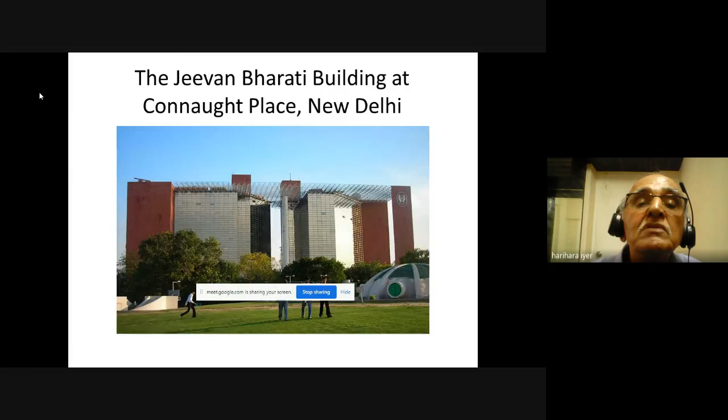See, this is Charles Correa. How many participants know about him? Okay, I will come to that. This is some of the Gandhi Smarak Sangrahalaya Ahmedabad. This is Jeevan Bharati building, Connaught Place, New Delhi. This is British Council.

Laurie Baker, we already discussed. Nobel laureates. Now, John Goodenough, 97 years. He has invented the lithium ion rechargeable battery, which is of relevance now today when we talk about green buildings, because that is the essence for solar rooftop, which can store energy for your building consumption, green building consumption. Then look at his age, 97 years.

That means you have got enough time. We have got enough time. We senior citizens also have got enough time. We have seen our earlier speaker, Professor Ramana, has got his doctorate after his 65th year from a foreign university. So age is just a number.

So lithium rechargeable battery is of importance in the present day green revolution, because that can be applicable not only for storage of solar energy, but also for the storage of energy for running your future vehicle, e-mobility.

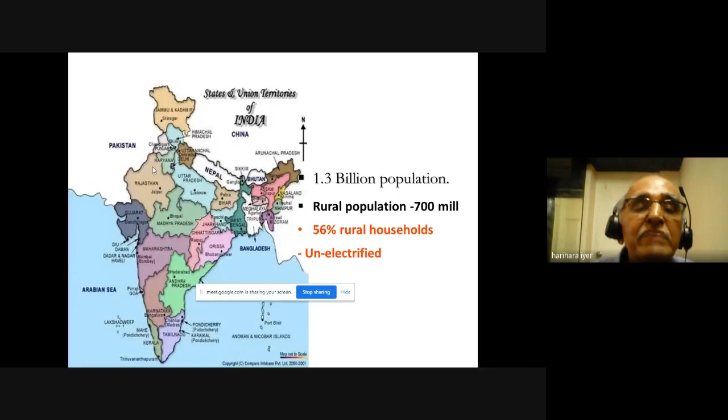But then, unfortunately, what is happening is there are structures, buildings throughout, whether it is Hyderabad or any city, all concrete structures, all steel constructions, that are mostly inefficient, that is energy inefficient. So all increasing the global warming.

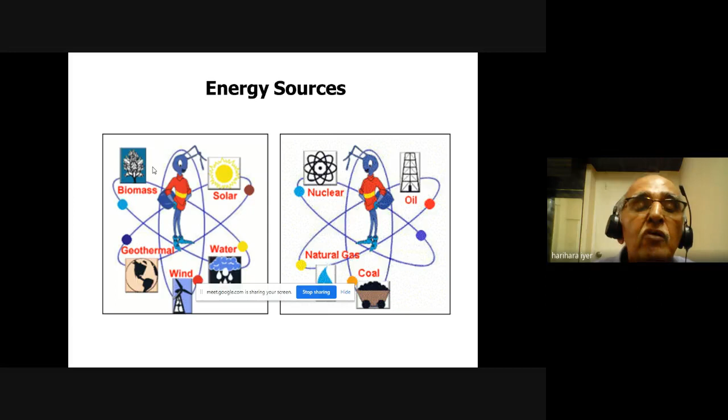Now, energy resources, Professor Ramana has well eloquently expressed, I don't want to go into the details. And solar energy is going to be the next tested energy source.

Hyderabad, where from we are speaking, was a very salubrious climate 10 to 20 years back. Now it is all plus 45 degrees, and there is unnecessary damage of forests, whether it is needed or not. So this is the situation, global warming facts.

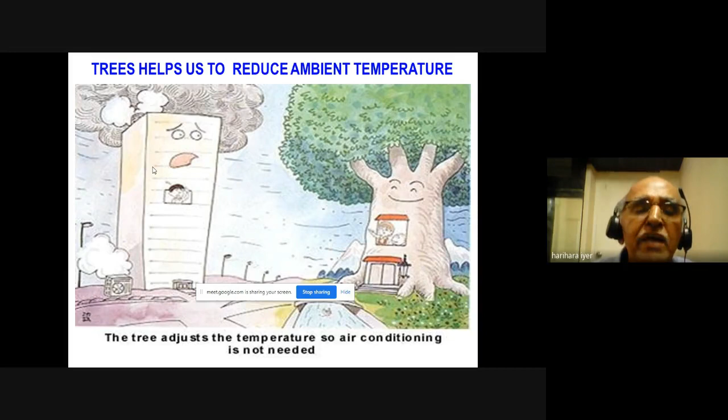Now, we also see the addition of carbon footprints by using our electronic and electric gadgets. So these are the carbon footprints. So the solution is again green building.

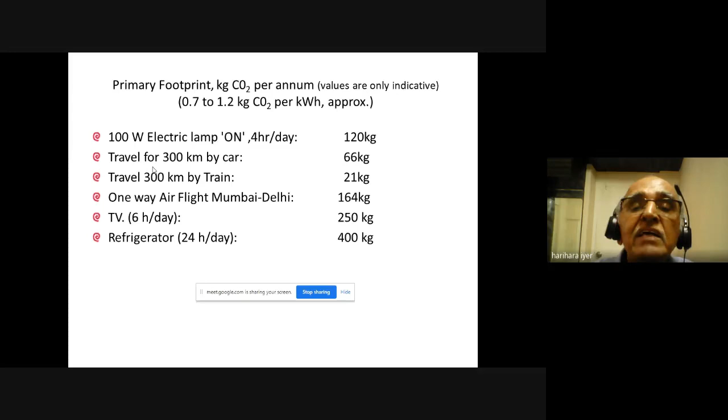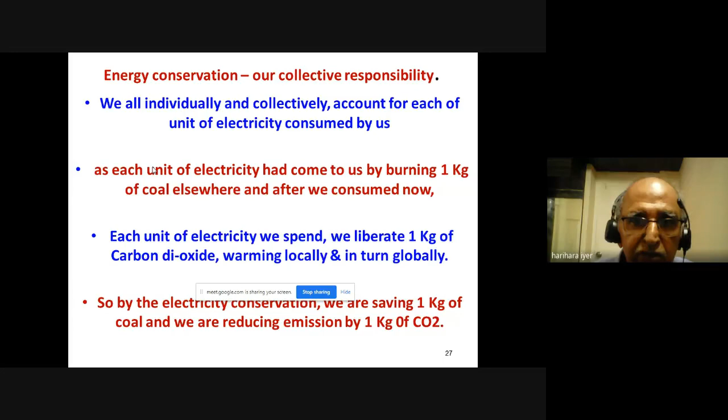So it is due to human cause, but these are man-made disasters, anthropogenic disasters. So we have to solve it collectively.

Energy efficiency benefits everybody, individually and collectively. Individually means we will be bringing down our electric billings. Collectively, the company in which you are working will be getting benefited out of energy efficiency measures, conducting energy audits.

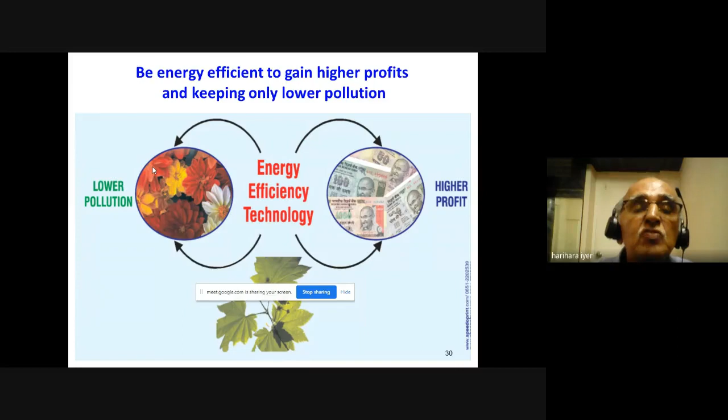Efficiency is related with profits, so the company can gain more, and economic prosperity will be generated. Renewable energy is last. First is energy conservation, then energy efficiency, then finally renewable energy.

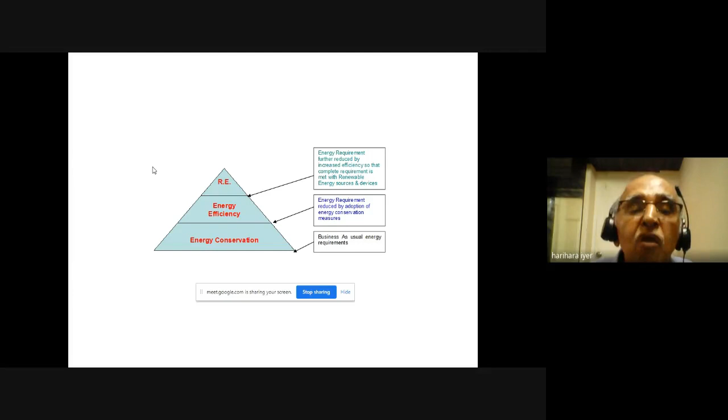This is an organization, or rather a pyramid of energy conservation and solutions. So energy consumption by sector - now you see domestic sector is 20%, that is in India.

What about in United States? United States is 72%. That means they consume the maximum energy, and their carbon footprint is much more than that. When there is 72%, a general arithmetic calculation, 72 divided by 20, is nearly four times more than us. Because they are developed, their consumption is more. Their per capita commercial consumption is far 4 to 5 times more than us.

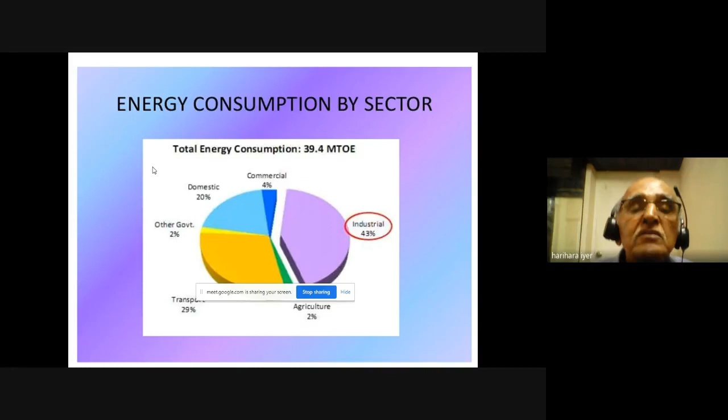Now, economy as a whole - agricultural, industrial, transport, domestic and commercial. Transport is up to 29%. Most of these are coming from petroleum, diesel, lubricants and fossil fuels. And our total electrical consumption is also because of fossil fuels.

Now, this Energy Conservation Act has already been discussed, so I'm skipping through them.

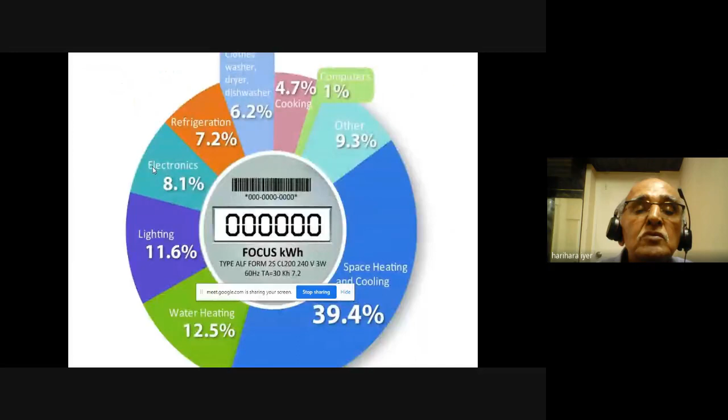So, power consumption by coolers and fans, fridge, TV - you see, these are our domestic consumption. Those who are interested, coolers and fans - what are the coolers? AC, air conditioners, and fridge. These are the cooling and heating systems, the main principal culprits.

So we should know how to tackle them, how to adjust our temperatures, fan speeds, depending upon our requirement. We have to see to it that without investing anything, we should be able to bring down our consumption.

How is it done? Switch off the lights whenever not necessary - these are simple things which you can do. In your home also, you can do a home energy audit to find out how much energy consumption reduction can be achieved.

First thing is to go through your power bills. From the power bills, you can understand how much is the total power consumption, and from there it can be brought down by adjusting the air conditioners. See, nowadays everybody has got an air conditioner.

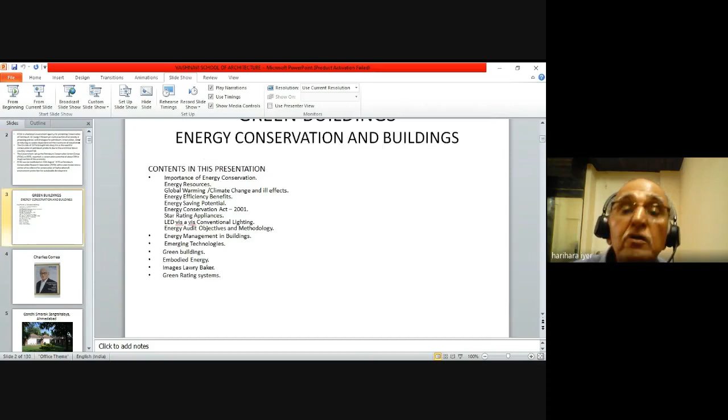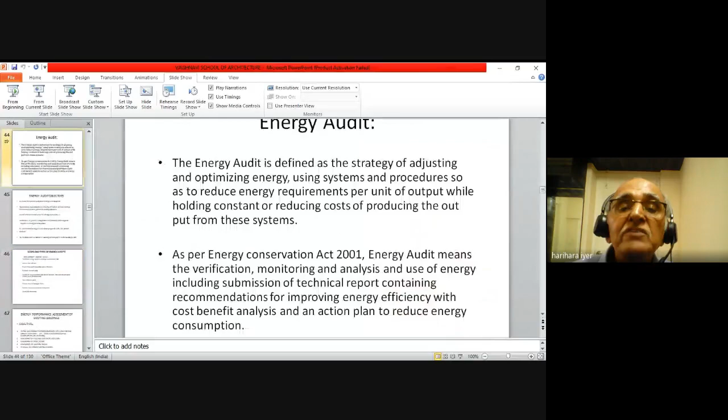So room air conditioners, refrigerator, comparative label, everything has been discussed. Lighting and fans, energy audit - these are the points already covered by Professor Dr. Ramana, including building energy efficiency.

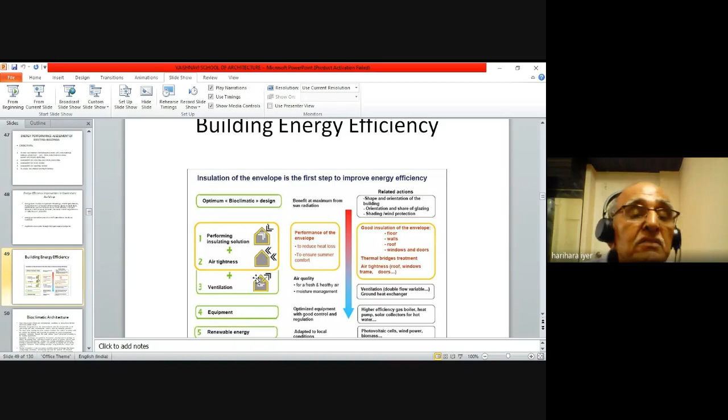So that is a subject to be discussed when we are talking about HVAC - heating, ventilation, and air conditioning. It's a very specialized subject. The organizations called ASHRAE and ISHRAE are on the job because it is a global environmental problem. So ASHRAE members will be getting all the details.

Now, bioclimatic architecture - the climate and environmental conditions are also taken into consideration, and thermal visual comfort inside, because comfort is more important. So when you consider the design aspects, that is based on local climate to make the best possible use of

Now, the shape of the buildings, surfaces - most of these points have been discussed by Professor Ramana. Then techniques to be applied by the external envelope, openings, and he has also requested acoustic aspects, very important. Acoustic aspects, in what way it is important. Lighting intensity is important.

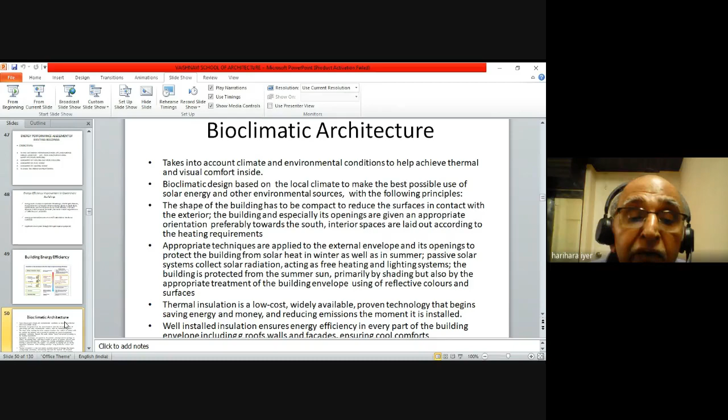Then thermal insulation at low cost, and we will be discussing in detail some of these aspects in future slides. Thermal insulation, R value - it has got its R value and U value, which are mostly discussed in the energy conservation building codes. So thermal transmittance, that is the U value, that is thermal resistance R value, and heat losses through the U value. These are things which have to go in depth.

AC needs airproof - all AC requires this because it is working in a closed environment. So we have to ensure that no leakage takes place. That's applicable to the refrigerator also - there should not be any leakage. Leakage happens means there is inefficiency, loss - there is a heat loss taking place. That loss has to be added on by more energy consumption. So the simplest way is to arrest leakages and have an environment where it is airproof, heat proof, for specific energy uses.

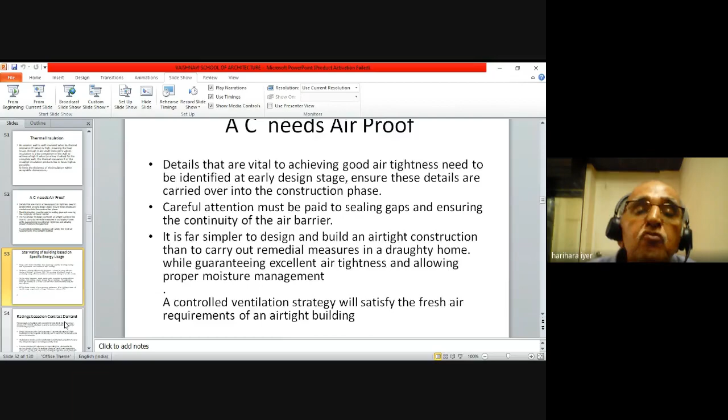Energy audit studies involve something called specific energy efficiency, specific fuel efficiency. The Bureau of Energy Efficiency has a scheme of energy efficiency labeling of buildings called the star rating. We will discuss in detail what the star rating program is, which provides public recognition of energy efficient buildings, thus creating market demand for such buildings.

BEE star rating system is also one of the rating systems. We will be discussing in course of our presentation very many rating systems. The first rating system is Energy Star labeled, based on the Energy Conservation Act. That is the first thing we have to understand. Second thing which BEE has introduced along with the star rating is the Energy Conservation Building Code. We will have a discussion about it.

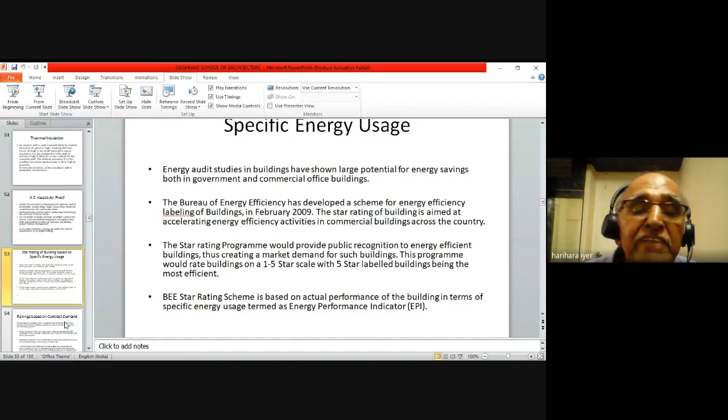Professor Ramana has highlighted some points, and we cannot go into the details. Energy Conservation Building Code requires explanation, requires 5 or 6 days of full session. Ratings are based on contract demand. 120 kVA buildings have already been discussed. So beyond that, you need an energy audit to be done.

So that is for commercial purposes. What is used in commercial purposes? This law is already there, but it's yet to be implemented. But it will be coming soon, sooner or later.

So, climatic zones - warm. We have got 5 different zones in India. These are climatic zones based on warm and humid climate, composite climate, hot and dry climate, and temperate regions. These are the basic regions generally used for rating purposes.

Can anybody say which type of climate Hyderabad comes under, and which cities fall under warm and humid, hot and dry, or temperate regions? This is hot and dry climate, this is cold climate - so you can keep these in mind. You can give the answer in the chat box.

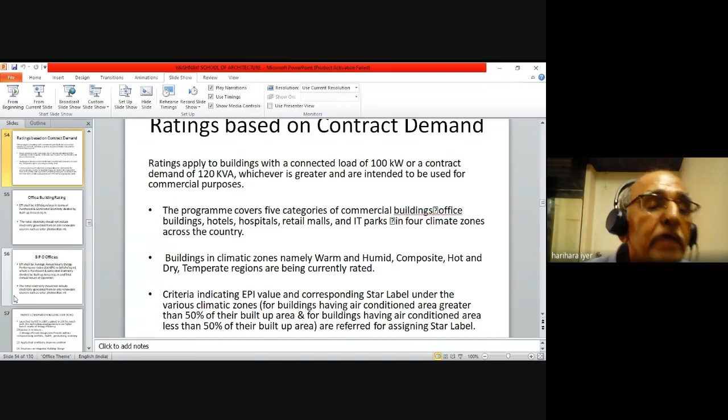Now for office buildings, EPI, Energy Performance Index, shall be the kilowatt hours per square meter per year in terms of purchased and generated electricity divided by built-up area in square meters. The star rating is based on this. There are standards given based on this particular kilowatt hour value - 1 unit per square meter per year has been prescribed.

So a total table has been taken, and based on that, you can apply for star rating. The total electricity shall not include electricity generated from on-site renewable sources such as solar. So it is devoid of that - you cannot consider that for the rating system.

For BPO offices, again, the average annual hourly energy performance index is in watt-hour per hour per square meter. We are going into further detail for BPO offices, because BPO offices consume much more electricity power than ordinary buildings. The total electricity shall not include electricity generated from on-site renewable resources - same conditions.

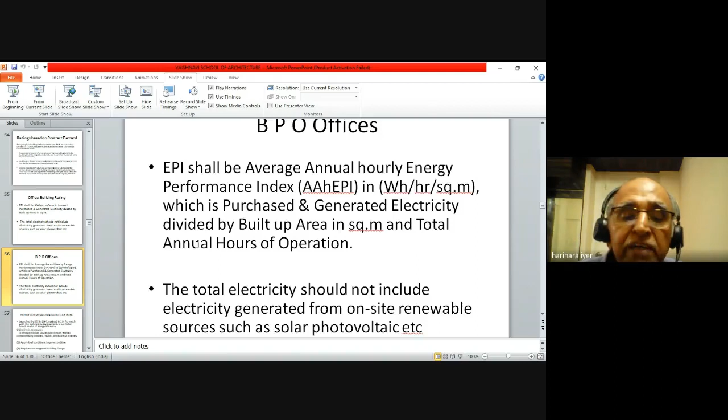Energy audit design for BPO offices, energy audit launched by BEE. This is the Energy Conservation Building Codes. These codes were launched by BEE in 2007, and updated in 2017, 3 years back, with technology development setting higher benchmarks for energy efficiency.

The objective is to ensure energy efficient design and retrofitment without compromising comfort. That's very important - you should be as comfortable as possible, considering health, productivity, and economy. Apply local conditions to improve - that's what local condition was about.

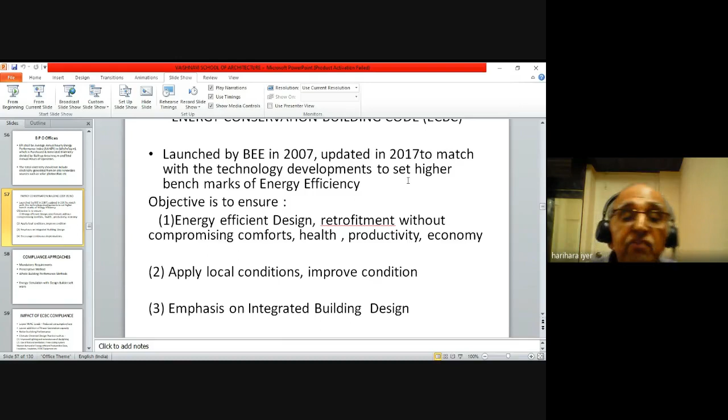So we have given five climatic conditions. Depending upon that, conditions in Hyderabad may not be the same as in Vijayawada. It may not be the same condition in Bangalore or in Jaipur, Rajasthan. The conditions are different - the emphasis is on integrated building design.

So in compliance approach for energy conservation, there is mandatory requirement - certain requirements are mandatory, no compromise. Then a prescriptive method based on climatic conditions, everything based on that. And a whole building performance method. These are the two main requirements - prescriptive method and whole building performance method.

Details are there in the Energy Conservation Building Code 2017. The simulation can be carried out by software. There are several softwares, some payable and some free, out of which Design Builder software is one of the software used for building simulation.

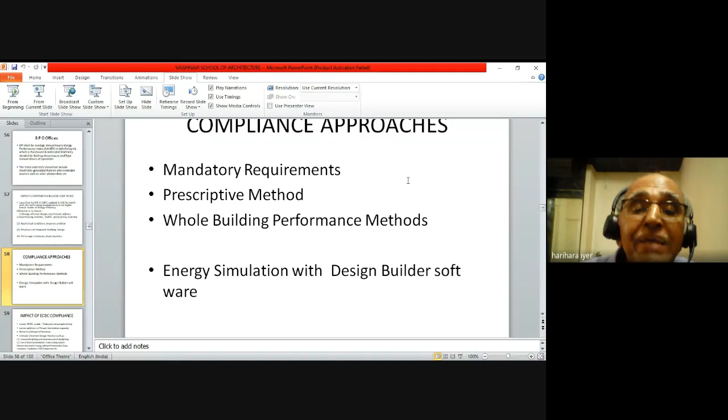So the impact of ECBC compliance includes, lower HVAC load, reduced consumption cost, lesser addition of power generation capacity, better building performance, climate-oriented design practice such as improved lighting and extensive use of daylighting, use of natural ventilation and free cooling systems, and market demand for energy efficient products such as glass, insulation, and HVAC equipment etc.

Now, Energy Conservation Building Code compliance is very much required for new buildings. It is made compulsory, and it has been implemented also. Accredited architects are necessary to go through the building design and give certification. Only then, in Telangana, is it possible to proceed further with the building construction. This is applicable to the commercial buildings which have already been discussed.

Now, green buildings. What are green buildings?

Green buildings involve daylight simulation, shading analysis, lighting simulation, energy simulation, and climatic analysis. All these are put together to make a building green.

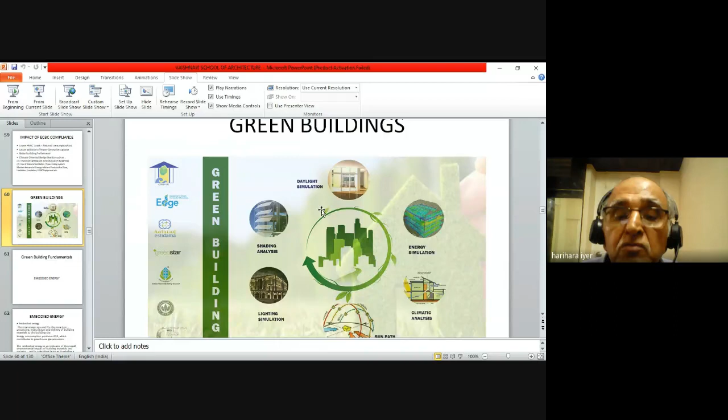This will go into the details of green building fundamentals. What are all the green building fundamentals? Materials of construction - the total energy consumed by a building includes the embodied energy.

What is embodied energy? It is the total energy requirement for the extraction, processing, manufacture, and delivery of the building materials to the building site, as Professor Ramana has very aptly described.

What about cement manufacture? 180 kilowatt hours per ton of cement manufacture, which has been brought down to 80. So there is embodied energy in the cement we use for building construction, which is absolutely necessary. Nowadays we are only constructing buildings with cement - there's no alternative to cement till now.

So the cement has to be manufactured, then brought to your site, and there is transport involved - fuel consumption is involved. If you bring it by trucks, or if it comes by railroad, there is electrical consumption involved too. So this is also added to the embodied energy.

Energy consumption produces CO2, which contributes to greenhouse gas emissions that we have discussed earlier. So embodied energy is an indicator of the overall energy impact of building materials, contributing to global warming, and is a deciding factor in whether you are selecting the proper materials.

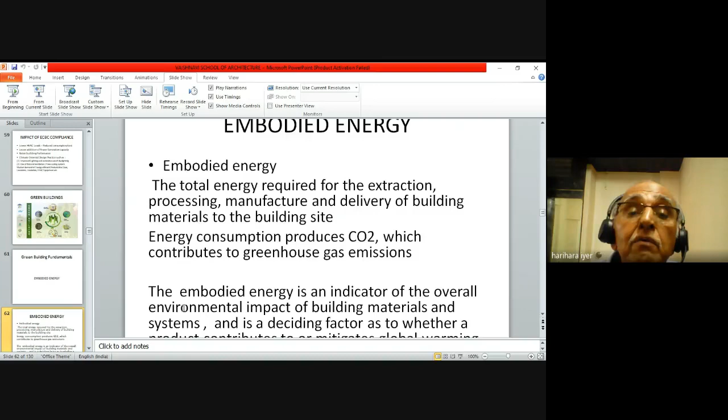We will go into the details of what are the proper required materials to make a green building. The total amount of embodied energy may account for 20% of the building energy use.

Reducing embodied energy significantly reduces the overall environmental impact of the building. So embodied energy must be considered - it's one of the most important criteria for the lifespan of a building also. We have discussed life cycle cost, so this is another factor which has to be taken into consideration.

Now, after demolition of a building, what do we do with the demolished material? This is another thing - it goes to the land, to the dump. That's what we are generally doing. Once demolished, you throw away the material somewhere, adding to the land mass as unnecessary load.

As the energy efficiency of the building increases and energy consumption reduces, the embodied energy of the building material will also become increasingly important.

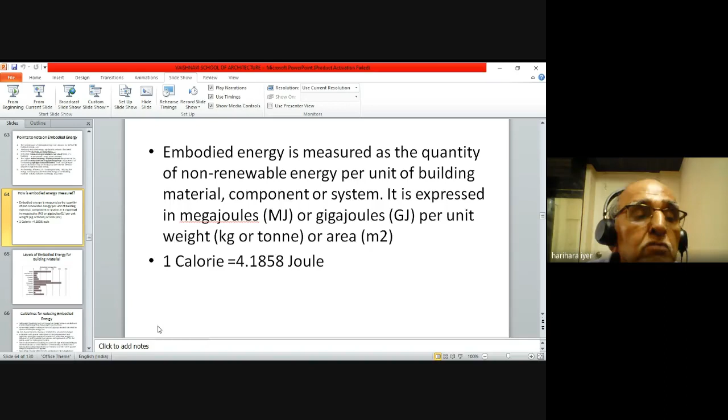Now, out of the materials, we will discuss embodied energy - we can measure embodied energy in quantitative terms in megajoules or gigajoules per unit weight. One calorie is considered as 4.1858 joules. Now these are the embodied energy values of building materials.

So the material to be selected for a green building is stone, then stone masonry. These are simple ideal materials to pick up for green building construction. But what is the next alternative?

Stainless steel, no - aluminum is preferred because you can reuse aluminum. Timber also you can reuse, so timber is the next alternative.

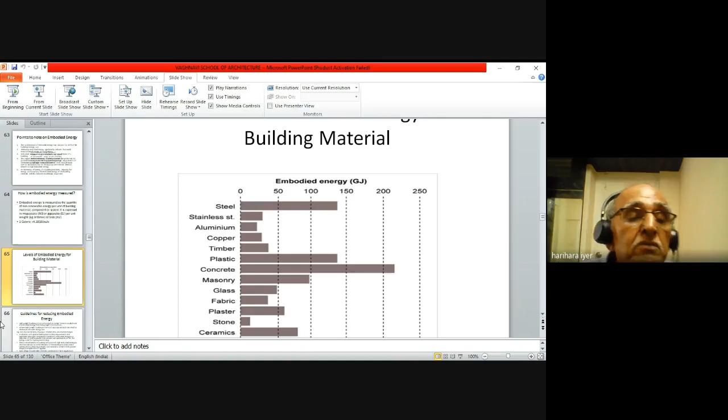For an aspiring green building enthusiast, these points are very, very important. Please note it down. In climates with greater heating and cooling requirements and night temperature variation, a high level of well-insulated thermal mass can significantly offset the energy used for heating and cooling.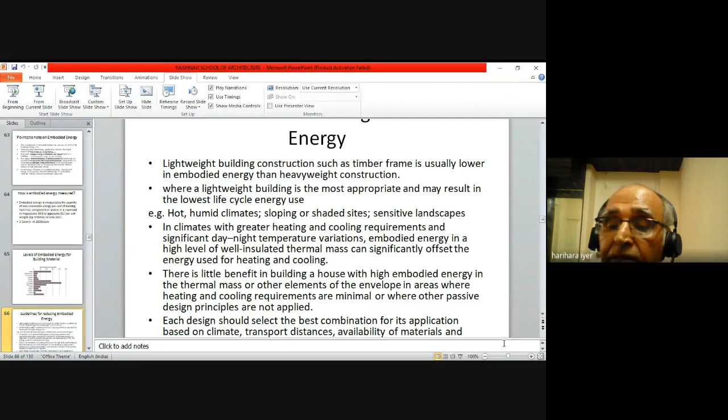There is little benefit of building a house with high embodied energy in the thermal mass or other elements of the envelope in areas where heating and cooling requirements are minimal. So we have to pick and choose the right material to suit the environmental conditions. Each design should select the best combination of application based on climate, transport distances, and availability of materials. Here, the architecture has got a big role to play in understanding and choosing the right material.

Now, management steps in green building: design for long life and adaptability, using durable, low maintenance materials. All these points given here below are important. You have to take all these points into consideration. There is a lot of scope here for research work. If you want to carry out research in architecture, we have to go into the scientific details so that we can work on future designs.

Recycled items are given a lot of importance. Why recycled items? The embodied energy is already taken away from the recycled material, so in a hypothetical situation, you can say it has zero embodied energy. Recycled materials, whether wood, masonry, or even cement, can be reused, and everybody knows it can be reused. But then some work is required to reuse them, and masonry can definitely be used back. So these are the points, I don't want to go into all of that.

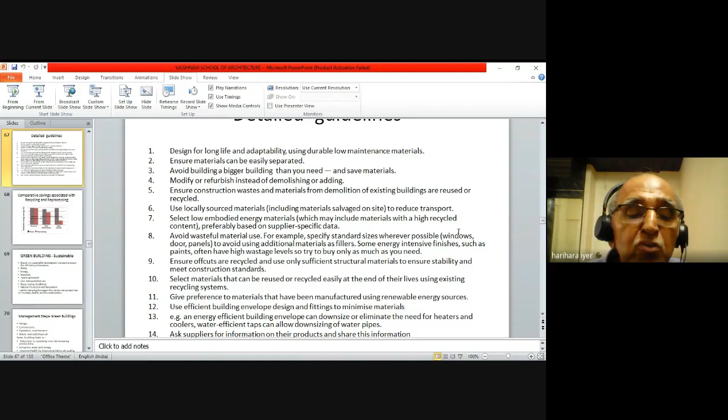If you want to go into the details we can go back to the slides, but the steps are all very important, each and every step. Recycling and reprocessing of aluminum, steel reinforcement, and glass products - we recycle, what are the advantages? Reuse and reprocessing. The embodied energy saving percentage has been shown. You can see that the percentage of saving in aluminum is much more than glass, glass and aluminum are almost the same, and reinforced steel is less.

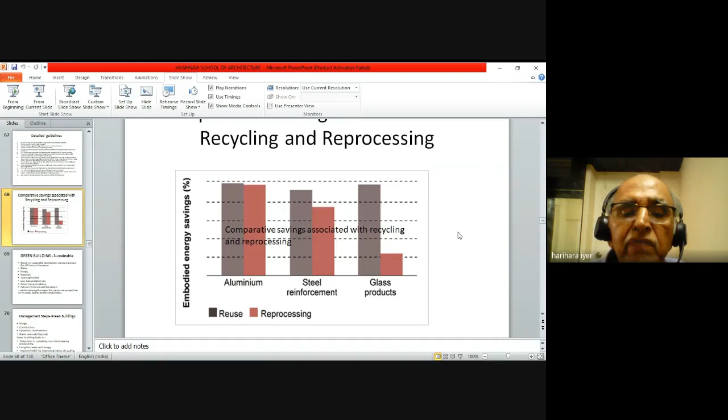Now, green buildings, sustainable green buildings - so we are discussing sustainable architecture, based on sustainable development concepts: water, energy, materials, waste generated, less transport and use, better living conditions, habitat protection and restoration. These are the important points for a green building.

So you can also make existing buildings green by increasing water efficiency, reducing water and energy consumption, and managing materials. Again, waste generation - what do you do with the waste you generate? Everything we throw out, the municipality ends up dumping our waste materials, including what we generate as domestic waste. Domestic waste is the maximum.

Hyderabad is totally filled up, they don't know where to dump it. There's no dumping space. And what about the transportation cost? What about the stink generated out of waste? Domestic waste has organic and inorganic components. The organic waste can be recycled - we can make compost out of it, and so many other things. We can even make combustible gas which can be reused for our kitchen, that can also be done.

The easiest thing we can do is composting. That composting can be used to manufacture organic fertilizers, which are very much required for our agricultural use, to grow organic vegetables.

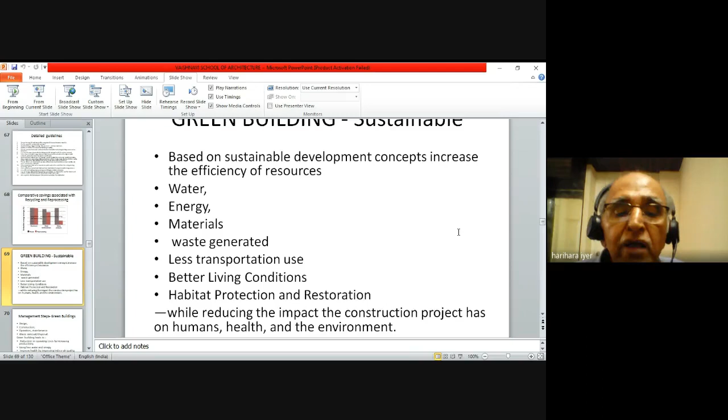Then habitat protection and restoration - we are more interested in habitat because individual protection, once you protect it in your own house, can be extrapolated to habitat protection wherever the society you are living in is. So it will have an all-pervading effect, a very, very good ripple effect, while reducing the impact of construction projects on humans, health, and environment.

Now green buildings again, management steps: how to manage green building design, construction, operation, maintenance, waste removal, disposal. We have already discussed materials, envelopes, orientation, construction materials, operation and maintenance. Green building leads to reduction in operation costs by increasing productivity, using less water. It's a repetition of points discussed earlier.

Now building design aspects, going into the nitty-gritty. High performance wall, fly ash bricks. Why fly ash bricks for walls? Because fly ash bricks have the lowest embodied energy and are very cheap available, provided local conditions are favorable and it's not coming from a far off distance. Fly ash bricks is a good option.

Insulation, then glass, appliances, BEE star rated, already discussed. Lighting system, energy efficient lamps, already discussed. Renewable energy sources: solar, photovoltaic cells, water heaters, biomass - these are the primary energy sources. Energy monitoring, energy meters, sub meters, water meters.

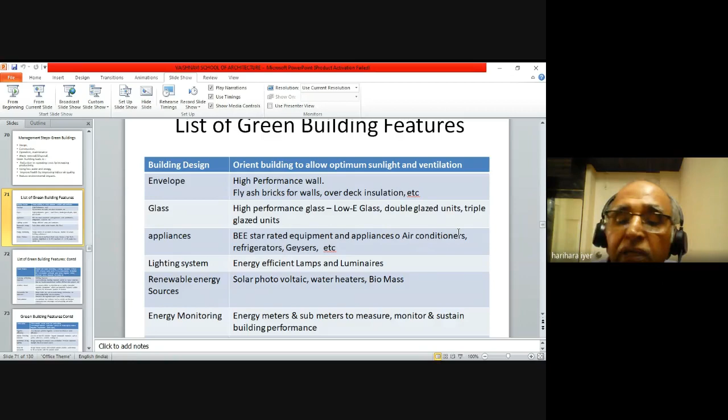Water meters are another area which is very, very important. Once you introduce water meters, we will know the consumption. When you know the consumption, we can introduce effective measures, because once you get charged for it, you will try to understand what it is. What you can measure, only you can control. If you cannot measure, you cannot control.

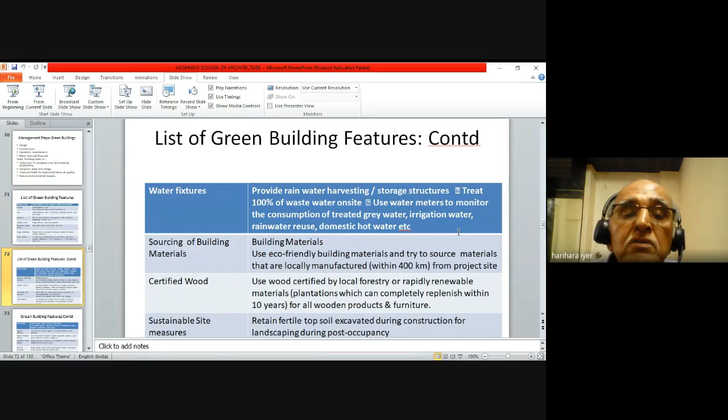List of green building features: source of building materials, certified wood - again going back to the basics, it's repetition. Irrigation efficiency, landscaping - green building features continued. Interior finishing materials already discussed. Ventilation and daylighting already discussed. Views for occupants again. Sustainable building materials were discussed. Construction,

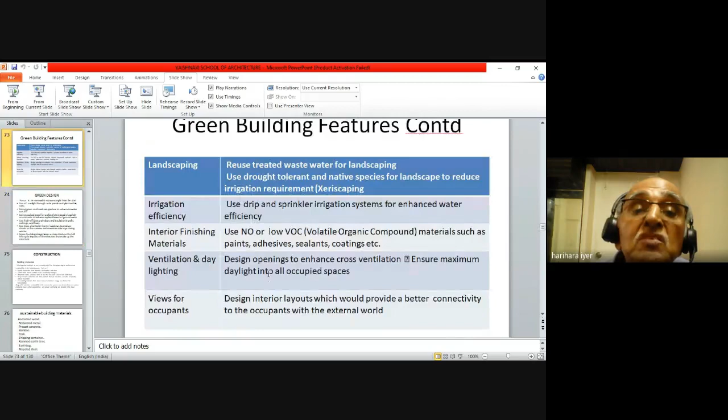focus on renewable energy, sunlight through solar panels using photovoltaic cells, using green roofs, rain gardens to reduce rainwater runoff. Nowadays rainwater harvesting is picking up fast. Each building can be provided with rainwater harvesting so water can be reused, and that will take care of water needs. We will discuss this when we discuss net zero energy building, net energy consumption.

But coming to green roofs, it is gaining prominence - what roof material do you choose? Underneath the roof you have extreme heat. At least 10-degree difference in heat can be taken care of with the proper roof material, so you can bring down your air conditioning load. Using packed gravel and packed parking lots instead of asphalt or concrete - these are materials which can be chosen. High efficiency windows and insulation in walls, ceilings and floors. Use trees planted in front of windows to produce shade.

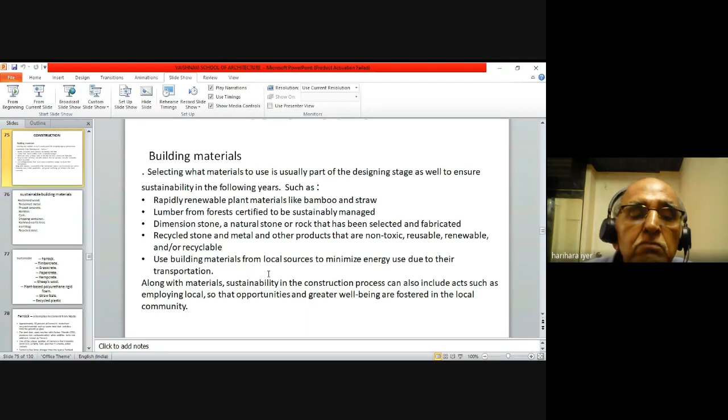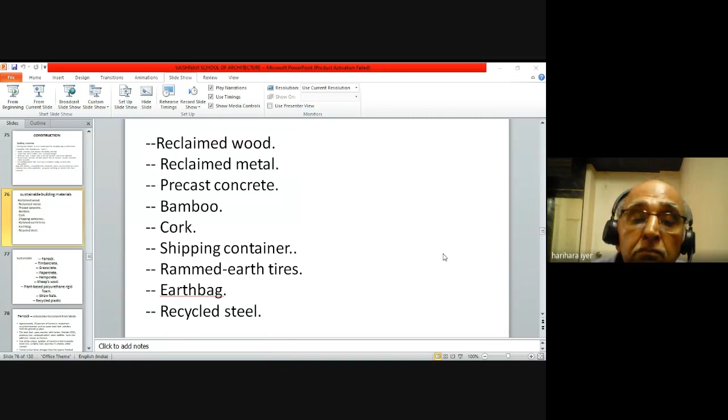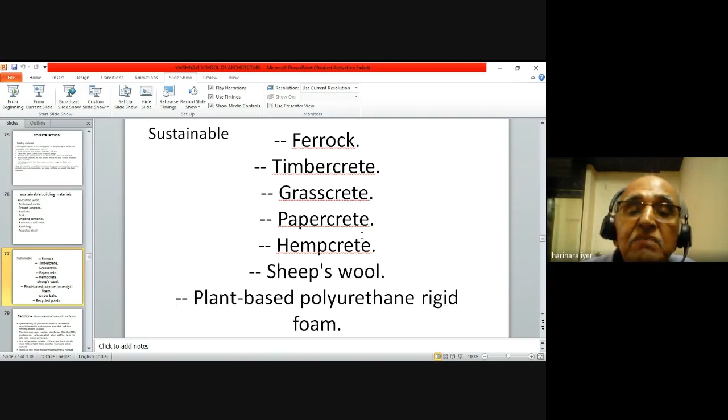These are the basic inputs I've given. So Ferrock is a material on which we can carry out more research to find out the suitability of this one in future green building construction material.

One of the unique qualities of Ferrock is that it absorbs more highly toxic gas than it creates, unlike cement, so CO2 emission will also reduce. It's 5 times stronger than typical Portland cement, so it is a big substitute for Portland cement - it is all very environmental friendly. All Ferrock is made from recycled materials. This is an area for research for future aspirants - the timbercrete, a blend of sawmill waste, cement, sand, binders, and non-toxic deflocculating additive.

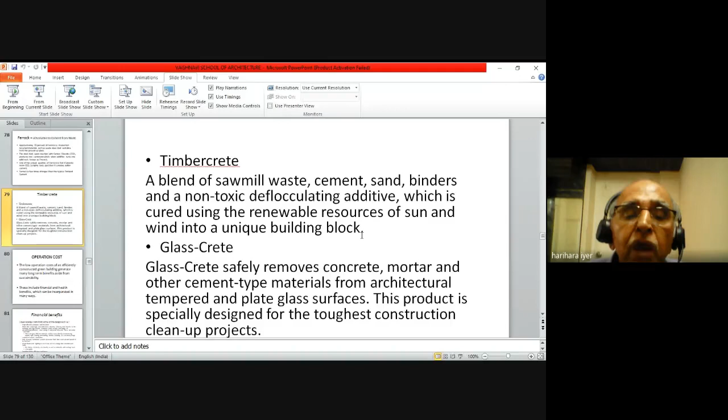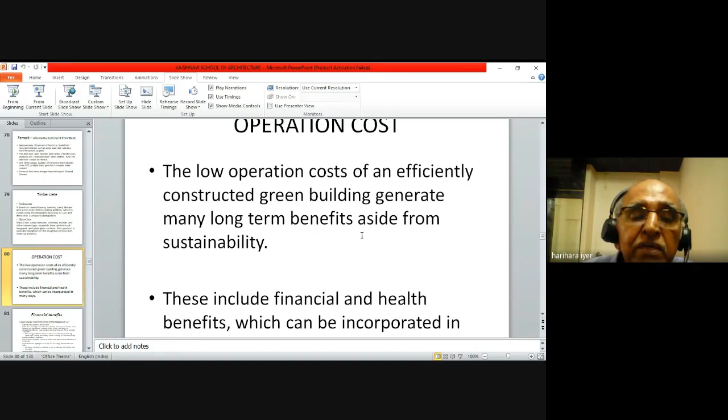Health benefits we have discussed: financial benefits, maintenance benefits, lower energy costs, designs such as high efficiency windows and insulation, roofs that create high solar reflectance. So many aspects are discussed, including capitalized natural ventilation.

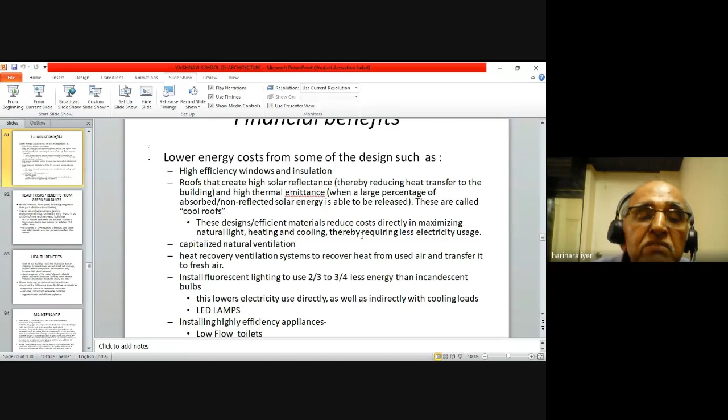Green buildings also provide health benefits. Indoor air pollution is among the top 5 environmental risks; unhealthy air accounts for about 30%. WHO reports that indoor air pollution causes 14 times more deaths than outdoor air pollution. So the more you stay in your house during lockdown, there are 14 times more deaths possible than COVID deaths.

There are hundreds of EPA regulated chemicals, including ozone and sulfur dioxide. Because we use a lot of chemicals in our cleaning, all these are embedded within the four walls of our house. These relate to health benefits.

Most of our dwellings have too much lead dust or chippings, which causes kidney and red blood cell damage, impairs mental and physical development, and may increase blood pressure. These are all scary facts, and honestly, putting together these slides is getting scary even for me.

About a quarter of our nation's industrial plants and water treatment facilities are in serious violation. This risk can be reduced and conditions improved through green building.

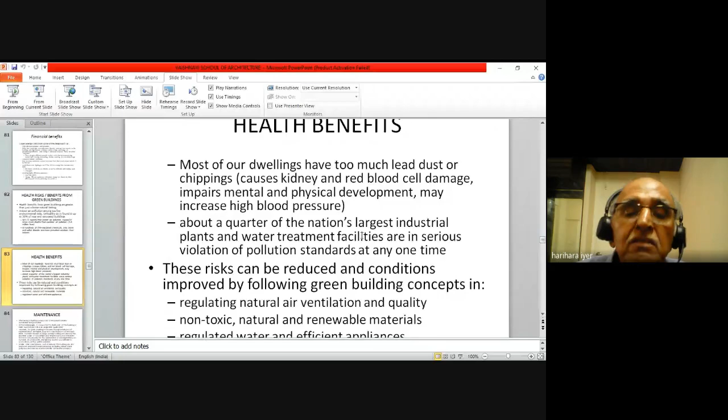Waste reduction. Maintaining a building is important as it ages. For green buildings, considering initial costs and everything, the long-term maintenance is often much lesser.

The advantage of green building is that maintenance cost is brought down — that's one of the key advantages highlighted. Smaller scale maintenance, such as cleaning the building, can also be chosen to improve indoor air quality, reduce water pollution, and maintain environmentally sustainable concepts.

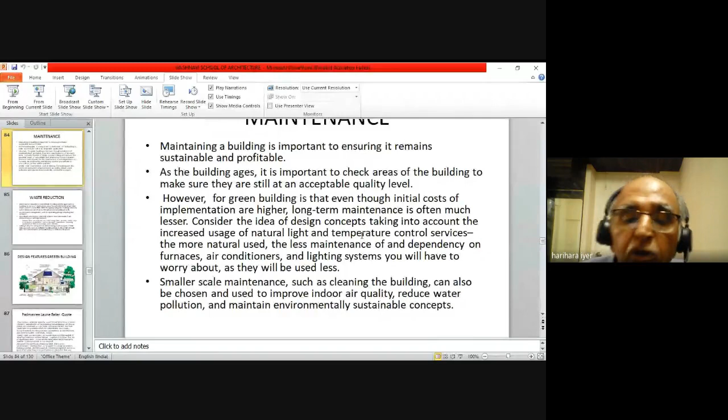Waste reduction can be achieved at several levels by taking a green approach to buildings, in terms of construction and materials used, which helps divert waste from landfills with appropriate green building measures. These points have already been discussed earlier, and we're highlighting them again.

On-site waste management, centralized wastewater treatment systems, and reuse of water — whatever water we use can be reused again and again. In fact, 90% of the water we use in our house can be recycled back into the system. Even drinking water can be derived from the water we create in our house, and toilet water can be recycled.

You can create manure out of that by composting it — organic manure can be created. And water purification plants are there; RO systems are already in place to make recycled water drinkable.

There are a lot of prospects for using water effectively and avoiding waste, because water is going to be a major component — water shortage is going to be a global issue. Here in our colony, we can't sustain without water tankers, and we don't want to bring down our water consumption, which wastes 60%; only 40% of what we get is actually needed.

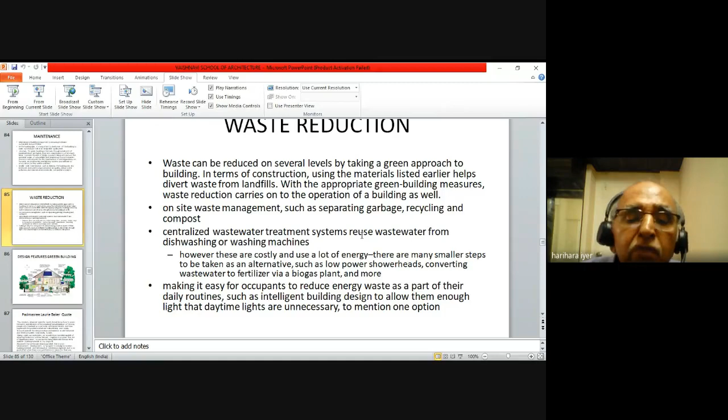Maybe 150 liters per person is sufficient for human consumption per day, making it easy, but we are spending more than 500 to 600 liters. Making it easy for occupants to reduce energy waste as part of their daily routines.

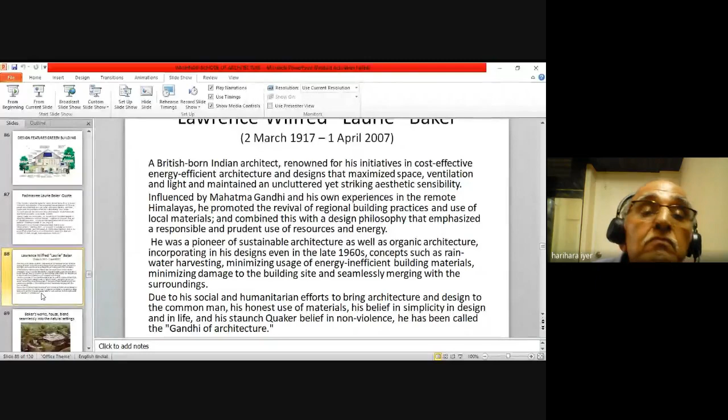Now these are some examples, seamlessly merging into natural settings. This is his house, which he made in Thiruvananthapuram, showing his work amid natural surroundings. Look around - anybody would like to live in such a place instead of staying in a concrete jungle.

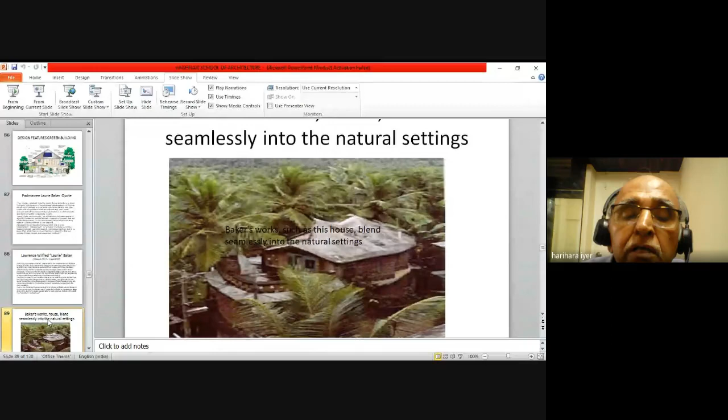Now green certification is based on a different scale - recycled and reused materials, waste reduction, reduced office waste, purchase and use of recycled content, energy savings, water conservation, pollution prevention, chemical reduction, reduced vehicle emissions, and environmental purchasing. All these aspects are taken into consideration while granting certification.

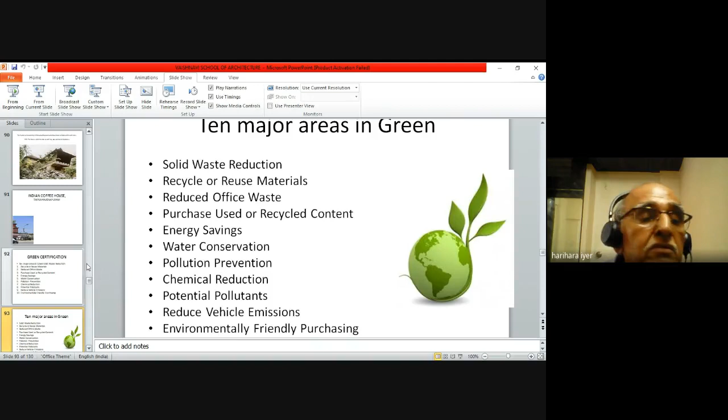So there are 10 major areas in the green building rating system. We already discussed the BEE star rating for buildings. Now GRIHA, another rating system, is pioneered by TERI, and TERI as well as MNRE use the GRIHA standards, taking the total habitat into consideration.

Next is IGBC, which is also an Indian rating system.

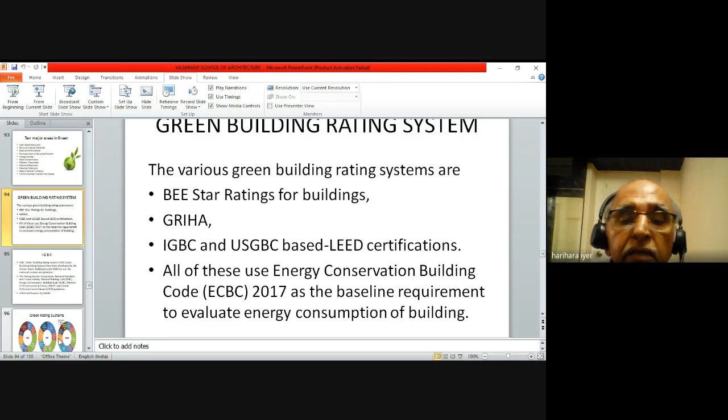IGBC is based on LEED certifications. That is USGBC, US Green Building Council. They are using LEED certification. Then ECBC, again we have discussed.

The Indian Green Building Council rating system, IGBC, has been developed by the Indian Green Building Council to suit the national context and priorities. The rating system incorporates national standards and codes: national building codes, energy conservation building code, Ministry of Environment and Forest, and Central Pollution Control Board. These guidelines are taken by them.

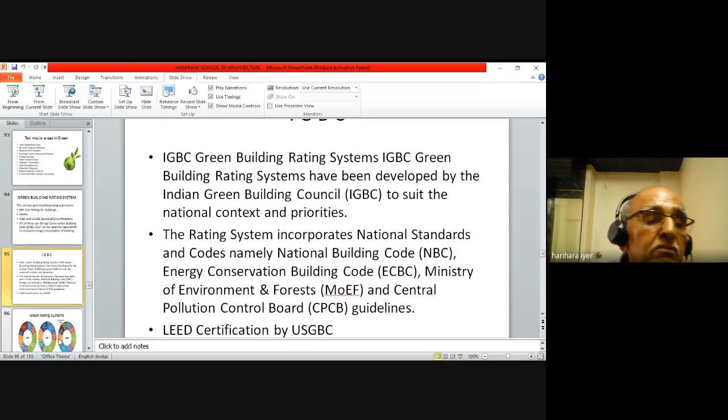LEED certification by US Green Building Council, LEED, for energy and environmental design of buildings. So these are the rating systems we already discussed: LEED, IGBC, and Griha.

Griha has detailed slides. Griha is an Indian system, so it is Green Rating for Integrated Habitat Assessment. The total habitat is taken into consideration from 2000 onwards. It has undergone a lot of changes from 2000 to now, the latest being 2014. Many changes have been made depending upon the time and environment. These are the areas where there are so many rating systems, around 25 or 26 of them.

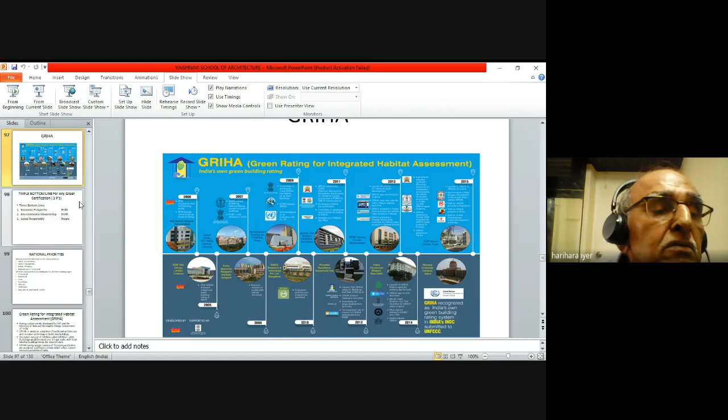Now each certification has got 3 bottom lines: economic prosperity, environmental stewardship, and social responsibility. This one is addressed to profit, this one to planet, and this one to people. These are considered to be the 3 vital P's.

This comes under the UN Development Goals, UNDG, so development goals are part of it. What are the national priorities? Water conservation, waste management, energy efficiency, and reducing use of fossil fuels.

Different rating systems are based on different building types: commercial, residential, cities, townships, schools, healthcare, data centers, and several others. Data centers are maximum energy consuming, so these also come under the rating system. Then commercial, residential, everything - cities and townships are also coming under that.

Now Green Co, that is CII, is also coming in - they have got a rating system which is not shown here.

Now the rating system developed by TERI, Griha - that is Green Rating for Integrated Habitat Assessment. We already discussed this point, so I don't want to go into it. It uses the best traditional architecture and modern technology to build new buildings. The latest version of Griha is called Griha 2015. This is the latest; it would be rated on a 1 to 5 star scale, with a 5-star labeled building being the most efficient.

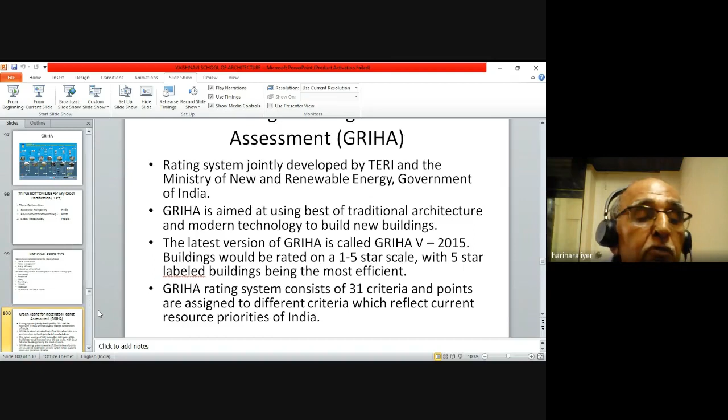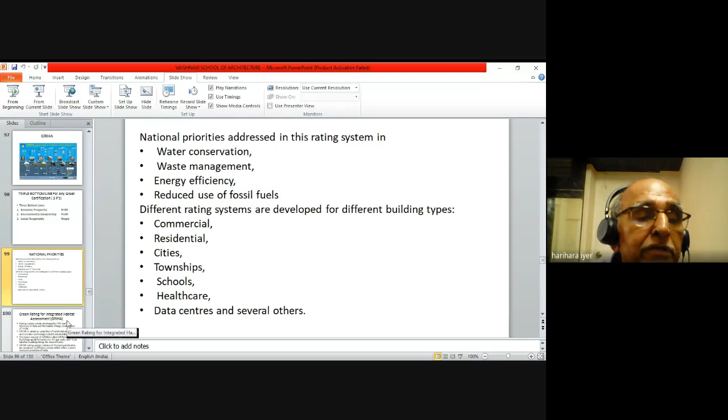I don't know what is your syllabus in the architectural examination. We don't know how far it is going to help you in the examination. I am not sure, but perhaps you can give feedback in the chat box on whether this is useful for your examination purpose. I will be very happy if it helps from your examination point of view.

That is very important. So the LEED system - which is Leadership in Energy and Environmental Design - it's a third-party certification for design, construction, and operation of a given building. This is actually contributing globally. LEED certification is global, no doubt it's global.

But to get this certification, you have to go through several stages, 2-3 different stages. Only then will you get the LEED certification, which is not as complicated as our IGBC system. LEED certification all over the globe is very high, but in India it is very less. So there may be an opportunity for your LEED certification, to be sure.

But then you have to undergo a lot of hassles, because you have got a preliminary associate level which you cannot use for your certification - it can only be a stepping stone. So you will be spending some time. Anyway, I don't want to discourage it, but this is one of the negative things which I observed.

Then LEED certificate in USA is a premium certificate, very global. These are all global. Australia has got a different green certificate, and Sri Lanka also has got it.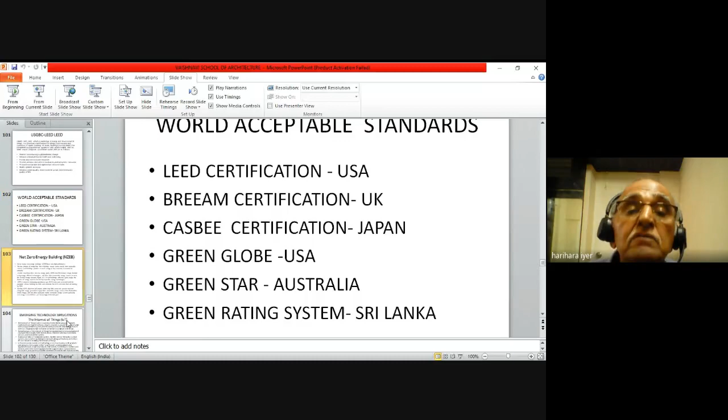Now we're coming to net zero energy buildings, which we discussed earlier. In net zero energy efficiency, you need not look for energy from anywhere outside. This energy can be created with your renewable energy sources.

It can be stored with your battery, and water can be consumed with rainwater harvesting. That can be stored throughout the year, which is sufficient, and you can recycle it. You don't throw it outside because 90% of the water can be used, and it has been proved from experiences of several users that rainwater harvesting can take care of

the yearly need. That may not be possible in a desert-like area like Rajasthan, but it is possible in a normal rainfall area. Definitely the coastal areas like Kerala, Goa, Bombay, it is possible. It is possible in Hyderabad also, but these particular things have to be tested.

In order to achieve net zero energy goals, net zero energy buildings must first reduce energy demand using energy efficient technologies, then utilize renewable energies. The net effect is we are eliminating the greenhouse gas totally.

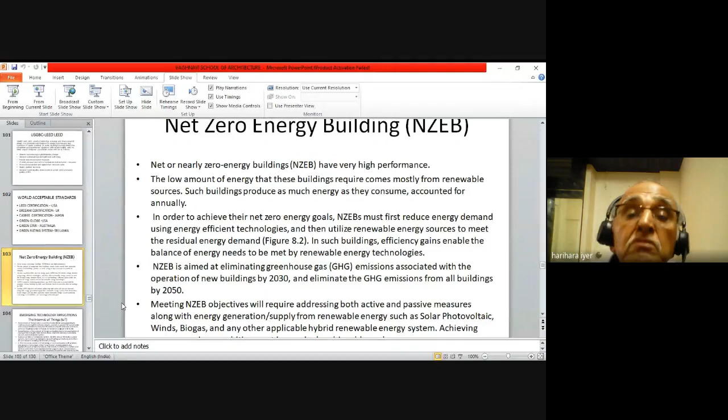Now we are coming into a different area, that is emerging technology. What is the emerging technology? Internet of Things. What is it? It has got to do with architecture and building.

There are a lot of things we have done because our modern building consists of several devices. We have got pumps, we have got STPs, we have got so many things there. Pumps are required for water, and so many devices have to be connected. So how is it possible?

Internet of Things - one internet with another gateway can connect all the devices, and you can control their operations, whether it is stoppage, controlling the flow, everything can be controlled by the IoT system. So it is Internet of Things.

It is being used in smart cities in a big way because it is connected with GPS - all the traffic systems, your road maintenance system, road layout.

Now the technology is coming in so fast, interconnected with so many divergent convergence of multiple technologies like real-time analytics, machine learning, commodity sensors, embedded systems, all with a wireless sensor network, control systems, automation. These are all coming into the building management system, so that entire thing will be one computer.

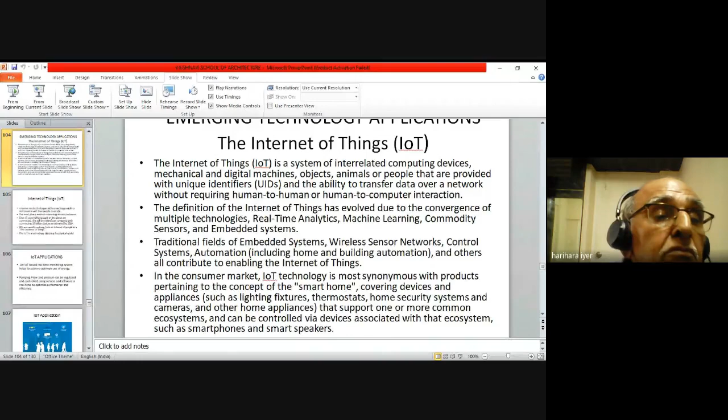So Internet of Things again will go - internet revolution began with connecting people to information. These are the nitty-gritties of IoT.

Today is a day of digitization, so in operation, maintenance, everything, digitization will help. We are rapidly evolving from internet of people to an internet of things. IoT is technology digitizing the physical world.

In an ordinary room, if somebody enters, you go and switch on the light, everything. With IoT and automatic sensors, there can be automatic thermal imaging sensors. You can control your air conditioner with this, controlling your temperature from 24 degrees to 25 degrees. What is the comfortable temperature of a human body?

I think that's a question which I ask in every forum, and there are boys and girls, males and females in the audience. So somebody says 26, 27, somebody says 18, somebody says 20. Okay, the human body temperature average is 24 degrees for a female and about 26 degrees for a male.

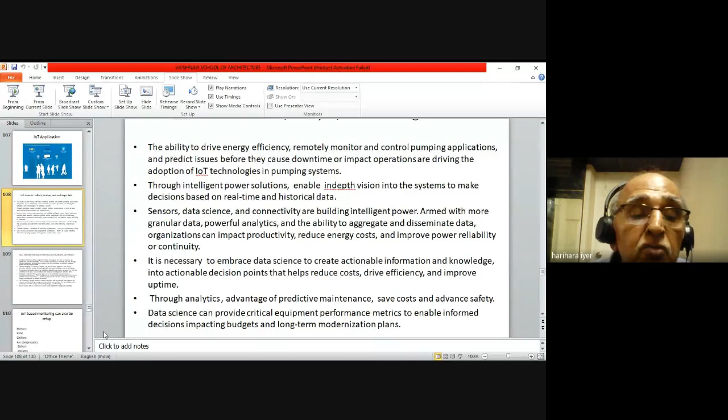Remote monitoring: if you want to have it on your mobile, you will get the operating system. You can control it, you can sit far away and also control it. So sensors, different thermal sensors, pressure sensors, are all going to drive this digital world. So in architecture also we have to be a bit conscious about it.

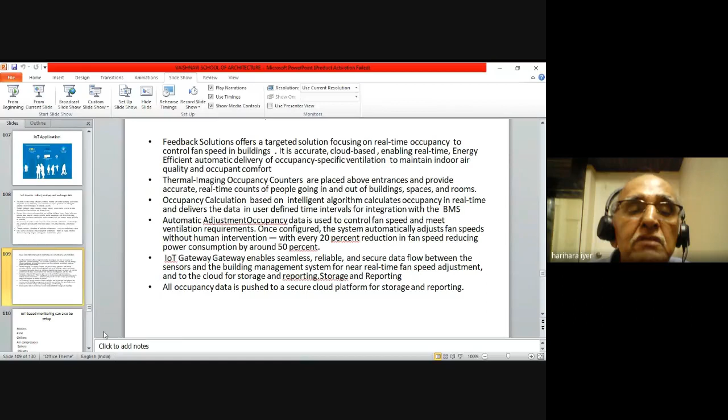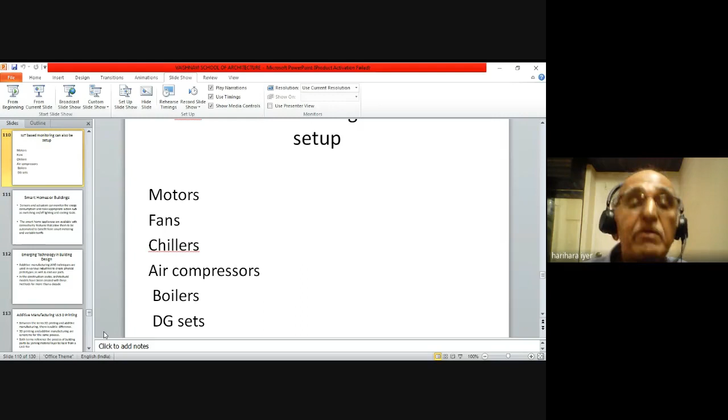So solutions, targeted solutions: real time occupancy calculation, automatic adjustment of occupancy data. Then the setup, you can have motors, fans, chillers, air compressors, boilers, DG sets, everything can be controlled. Smart homes and buildings, sensors with actuators can monitor the energy consumption and take appropriate action. The smart home appliances are available with connectivity features that allow them to be automated to benefit from smart metering and variable tariffs.

So additive manufacturing, I am going to the latest design feature of a building, a very advanced stage of building construction called additive manufacturing techniques, which is also called 3D printing. So additive manufacturing, from the word it says that you add on. Additive means add on. It is a manufacturing technology which has been developed.

The add-on layers come with a printing machine. It will be like a printing machine, but it will be giving out material and creating layers. You have already got a design, a digital design in your computer. You can make use of that computer software to construct a building using this particular method. So it has also come into the architectural domain, which is already popular in manufacturing design and is now coming to prominence in architectural design, that is building design industry.

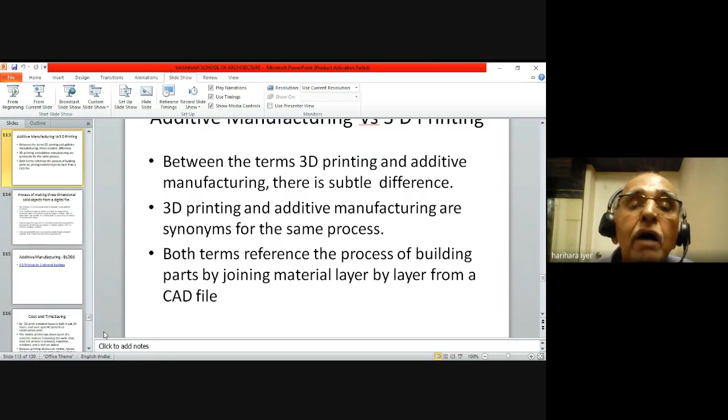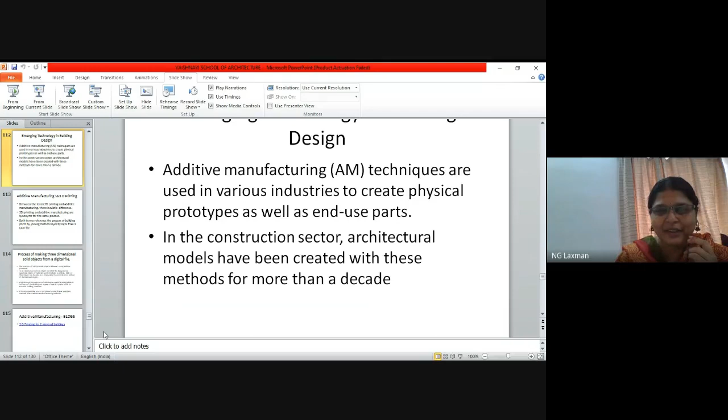I thought perhaps my presentation is taking precedence over hunger. No sir, we are really enjoying this session, it's very informative for the children. When hunger pangs come, nobody can stop anybody, including me, so hunger is important. Food, shelter and clothing first, only then you get knowledge. So before bhajan, do your bhojan, otherwise you will not concentrate. I don't want to go into this further, I will show the additive design video, please see.

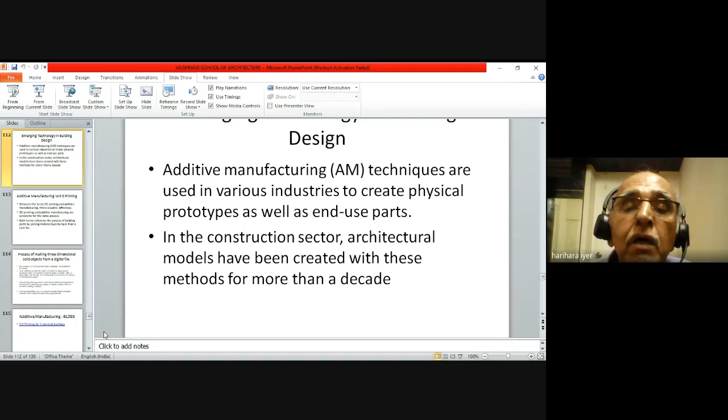This is 3D printing, additive manufacturing. I don't want to play the video now since it's like a slide. If somebody wants, they can stay back, others can take a screenshot.

No problem, because how many students are there now? How many participants are there? Sir, we have 44 participants with us. 44 participants, it's a very major achievement for me. It was 46 or 44.

Now this 3D printing, since somebody requested, I will show the video. But you can take your food meanwhile, because most people are working from home. I am also getting my lunch here while giving this.

Now see, 3D printing modest house. You can complete an entire building within 24 hours. So how much time are we taking to complete a house now? In 24 hours you can print and build a modest house, and the saving is 40%. No working persons are involved, no manpower, no migrant labor is required for constructing your building. Otherwise now migrant laborers have run away, we are in trouble. So with 3D printing, in 24 hours you can construct your house at 40% cost, with none of this waste.

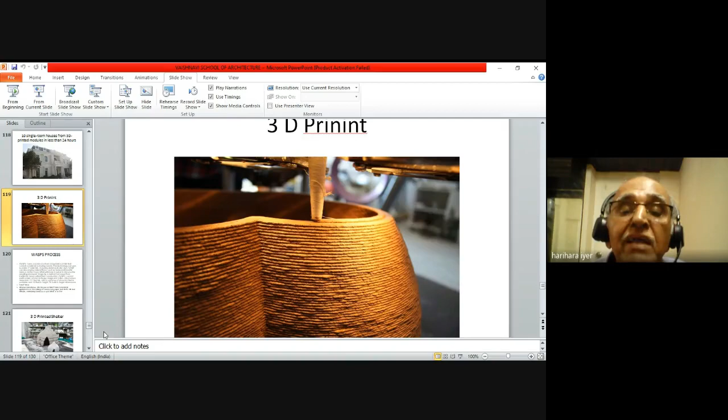A lot of waste can be avoided with these printed modules. See, these are printed houses, built in less than 24 hours. Now another 3D printing example - you can see the printer there, how all the layers are being made, layer by layer. It is very visible.

Another point - green certification. You cannot talk about green until you love your people and your country. I am here to say global warming, and you see this is done by Greta Thunberg, a Swedish girl, 15 years old. She became an overnight celebrity by saying this.

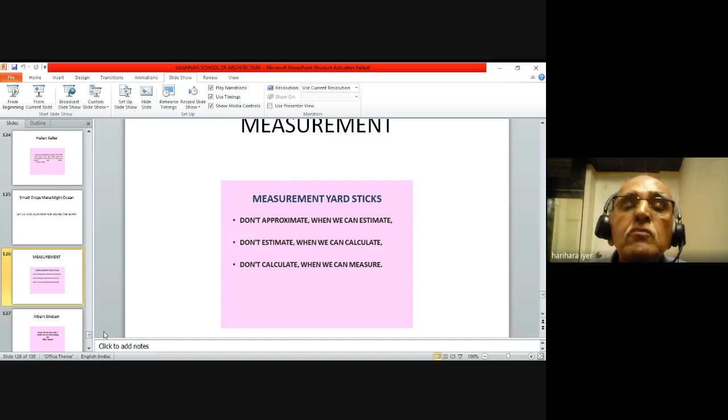Helen Keller said small drops make a mighty ocean, small changes also matter. Measurement yardsticks don't approximate when we can estimate - what you cannot measure, you cannot control. This is a basic fundamental of energy conservation.